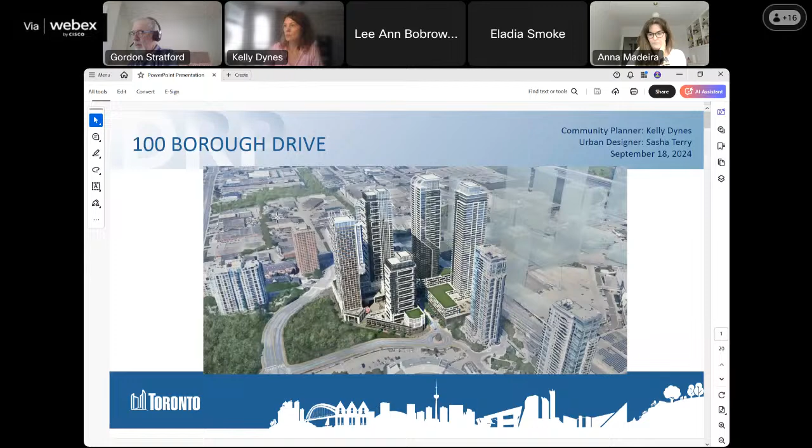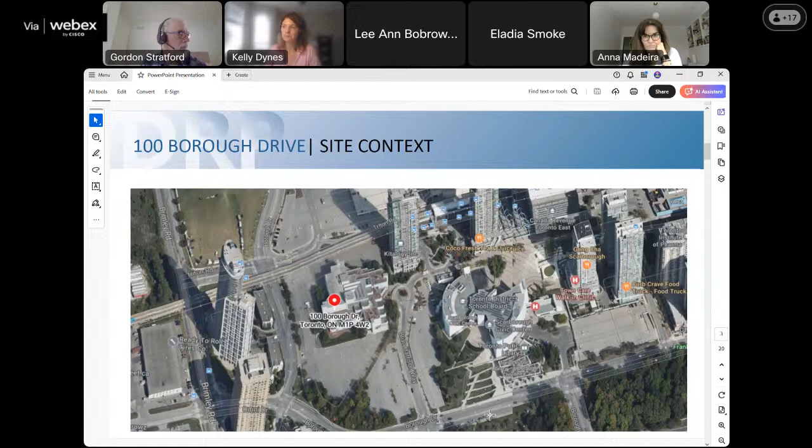The Bell Canada building is representative of the late modernist architectural style, constructed in 1978 by Short, Tilbe, Henschel, and Irwin Peters. It's listed on the city's Heritage Register through Delegated Listing Authority.

The Bell Canada building relates to the Scarborough Civic Center in plan view as a geometric pinwheel form responding to the irregular shape of the lot and the geometric pyramidal form of the Scarborough Civic Center. Additional design geometries can be seen in Albert Campbell Square with its radiating paving patterns, the Federal Building, and the blue canopy on the right-hand side. While not seen in this photo, there's also a water feature within Albert Campbell Square demonstrating the same triangular cascading form. Recent additions include the Civic Green in the middle of the property, and the rooftop of the Scarborough Center Library, which also continue this geometric landscape.

Staff are recommending design commemoration of the building with the proposed new redevelopment.

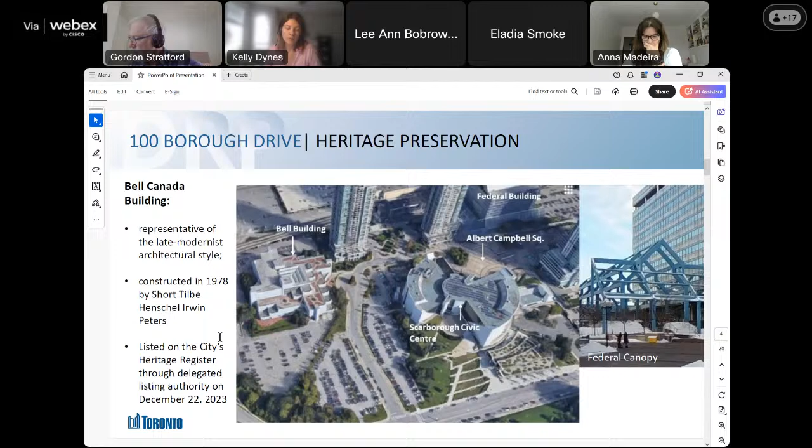This slide provides some additional views surrounding the site. The top left is a view from the subject site looking north, and a view looking east at the TDSB portion of the Scarborough Civic Center. Bottom left is looking across Borough Drive at the existing condo and townhouses. Here we see an important view from the intersection of Borough Drive and Brian Harrison Way to the building itself.

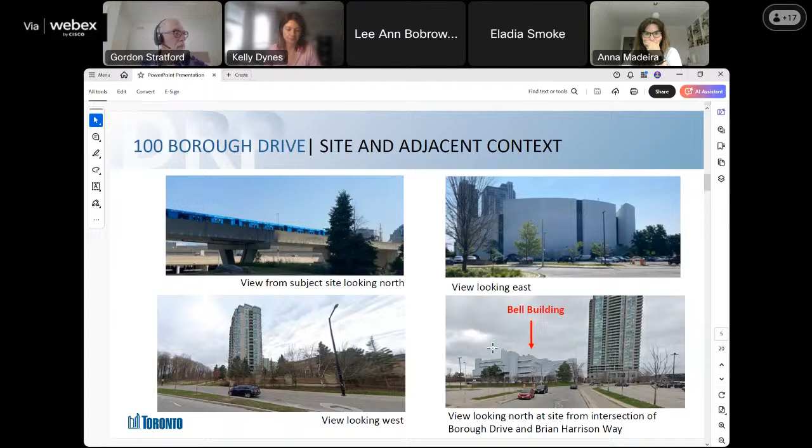I might just skip over this slide because I know the applicant will be talking about their specific application. As Gordon mentioned, it's an OPA and a rezoning, 3 blocks with 5 towers, just over 2,000 residential dwelling units, a public park, and a public street.

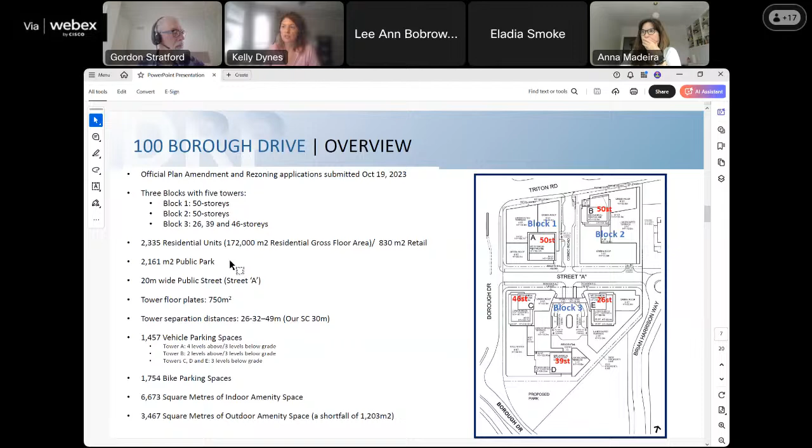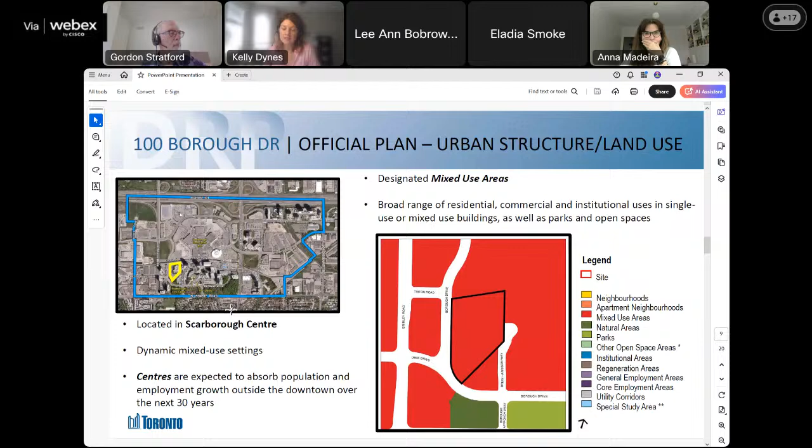Planning policies that guide the site: Scarborough Center is one of 4 growth centers in Toronto, as outlined on the map in blue. Centers are where we expect excellent transit accessibility and absorption of population and employment growth. Most centers are designated mixed use, including the subject site, which permit a broad range of residential, commercial, and institutional uses. The site is zoned City Center Residential and City Center Town Square Zone, which permit all residential dwelling units and some commercial uses.

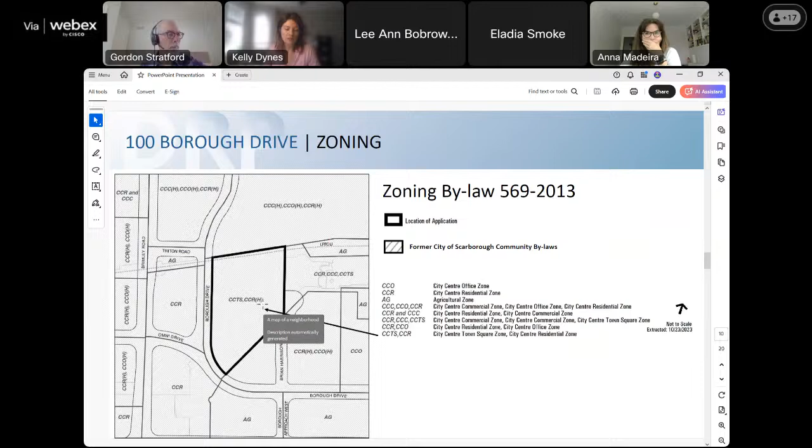Within Scarborough Center, we've seen significant investment in the form of transit and associated development pressure, and staff have been working on updating the Scarborough Center secondary plan. We expect to take draft policies out later this year or early next year, with a final staff report next year.

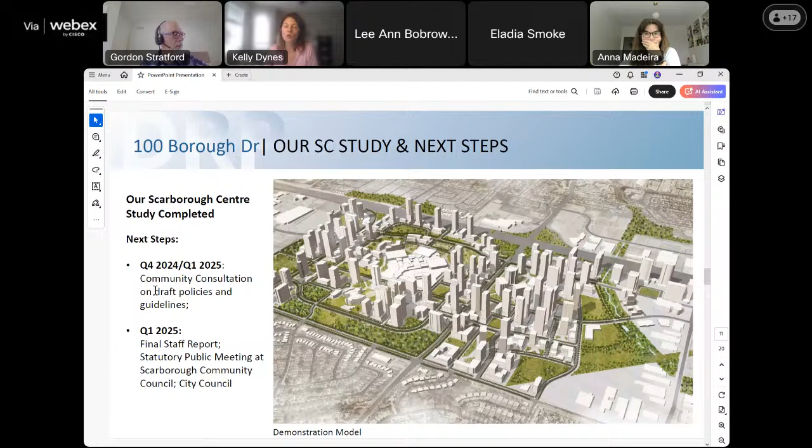Our Scarborough Center public realm plan envisions a central east-west 20-meter right-of-way neighborhood public street that connects to the existing public realm framework of Brian Harrison Way and Albert Campbell Square. We're also looking at a southerly on-site public park that protects the remnant woodlot along Borough Drive, a northerly SRT POPs, a commemoration of the SRT land in the form of a POPs, and a central north-south POPs mid-block connection that connects the public and private landscapes to Frank Faubert Woodlot Trail to the south.

Our Scarborough Centre study also gives guidance to protecting sunlight on important urban squares, parks, and natural features within the Scarborough Centre. Albert Campbell Square is a community focal point and urban square for Scarborough Centre, which includes seating areas, park areas, and an amphitheater that hosts community events during the day and evening. 7 hours of free, incremental shadow are recommended for protection of sunlight on Albert Campbell Square, which fronts the Civic Centre between 11:18 and 6:18 p.m. during the spring and fall equinox.

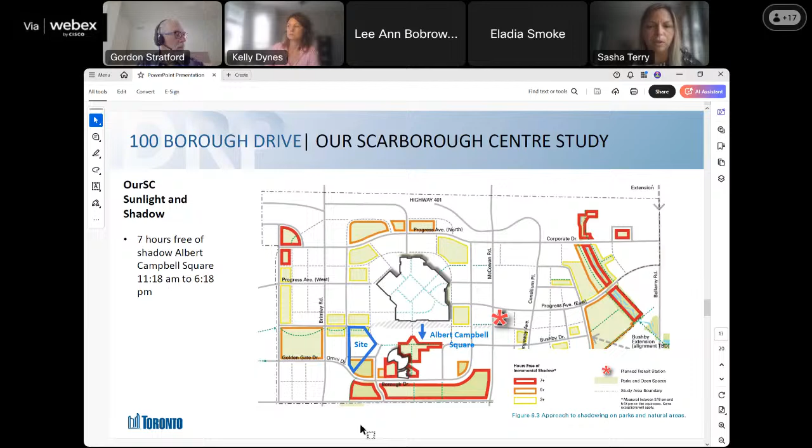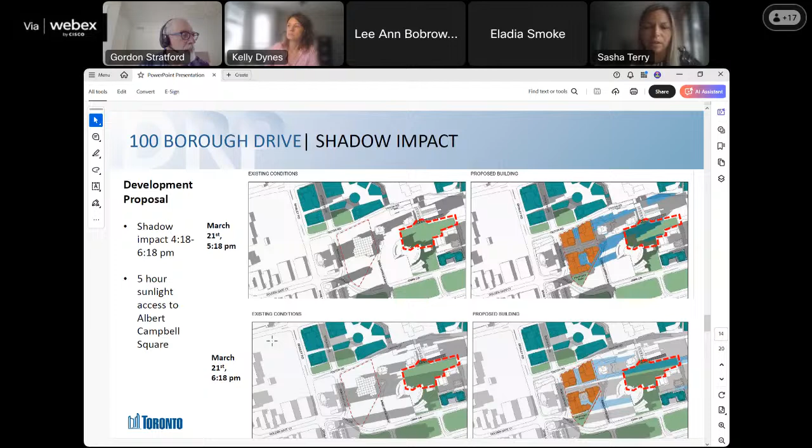The current proposal reduces sunlight on Albert Campbell Square from 7 hours to 5 hours due to 2 hours of shadow impact from 4:18 to 6:18 p.m. The southerly block towers are more impactful, casting shadows throughout the square between 4:18 and 6:18 p.m. Northerly block towers cast shadows on the northern portion of the square at 6:18 p.m.

So the current Scarborough building height strategy directs tallest heights to three emerging height peaks: a height peak at the subway station, a height peak along the 401, and a height peak at Brimley and Progress. Heights between the height peaks are to transition down to define the height peaks and fit within their existing height context.

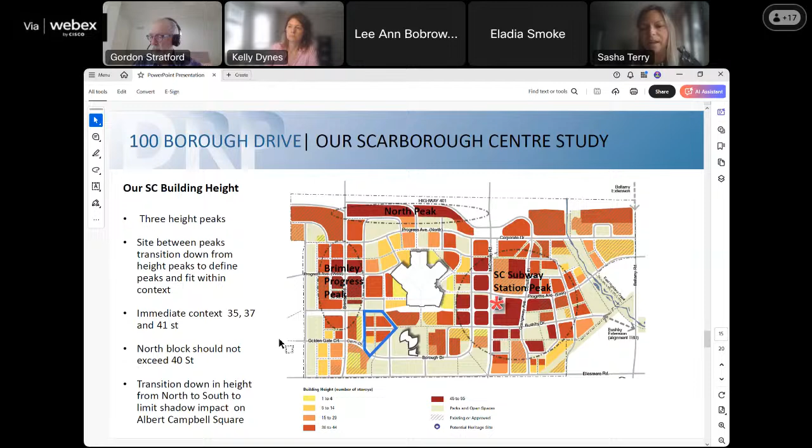This site is located outside the Brimley height peak and has an existing height context of 37 stories residential condominium to the east, 35 stories to the west, and 41 stories to the north. Staff's position is that the site should not exceed 40 stories at the northern block and should transition down in height from north to south to fit within the existing tower context and limit shadow impact on Albert Campbell Square.

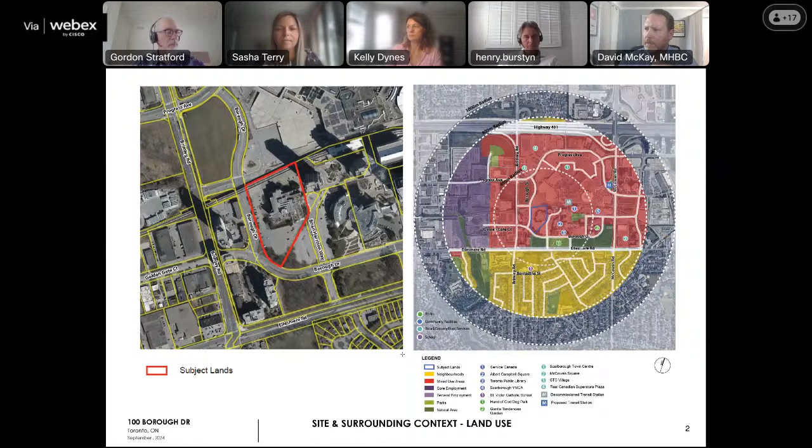The site in red is shown here. One item to clarify is that the SRT along the northern portion of the site is located on the property and not adjacent to it. So it is part of the property and is scheduled to be removed as per a legal agreement with the city and TTC.

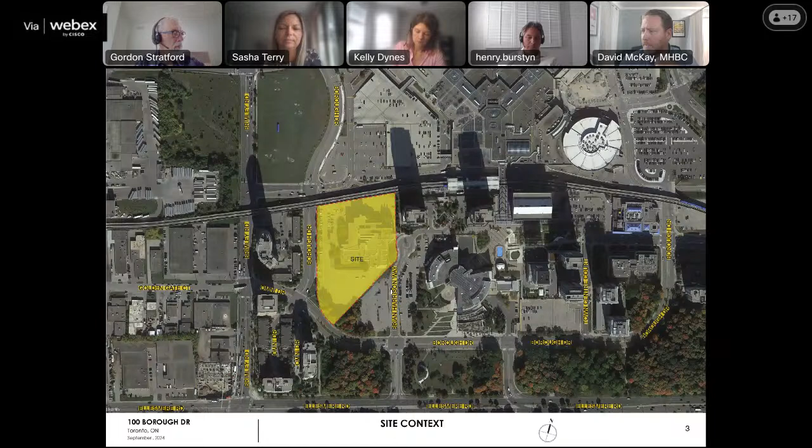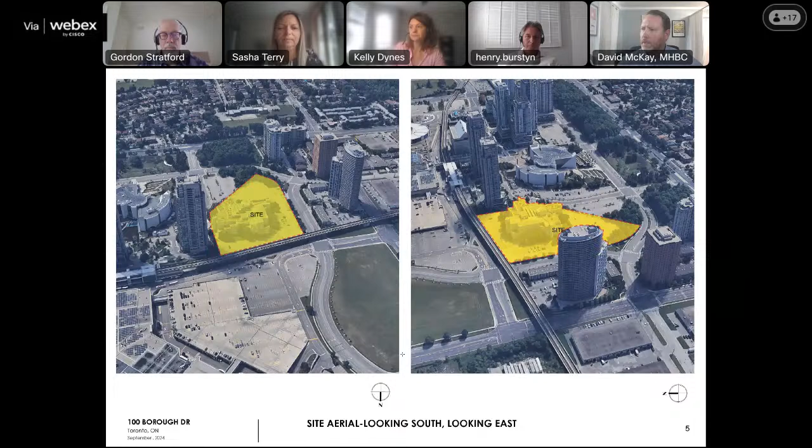These are just some views of the site from different angles. You can see the various developments that have occurred over the last 20 to 30 years surrounding the site, and then some photos of the site and surrounding area at grade.

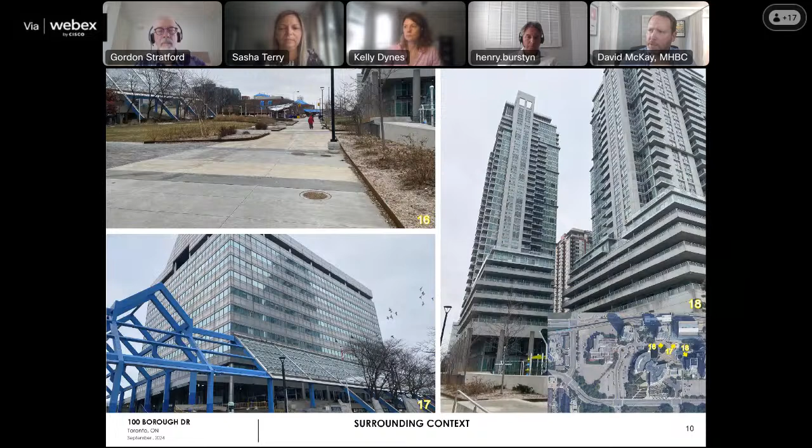There are a series of easements across the property. A number of them are in favor of the City of Toronto and will be relocated or removed as part of the redevelopment, and others in favor of private development, which we can also remove through legal means per the agreements with those entities.

As staff have mentioned, there are a series of development applications anticipated and in progress as part of the redevelopment of Scarborough Town Centre and surrounding area in relation to the future subway extension to the area.

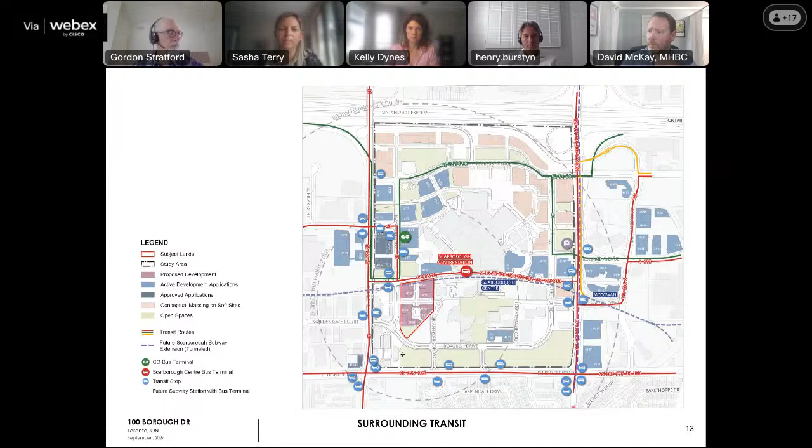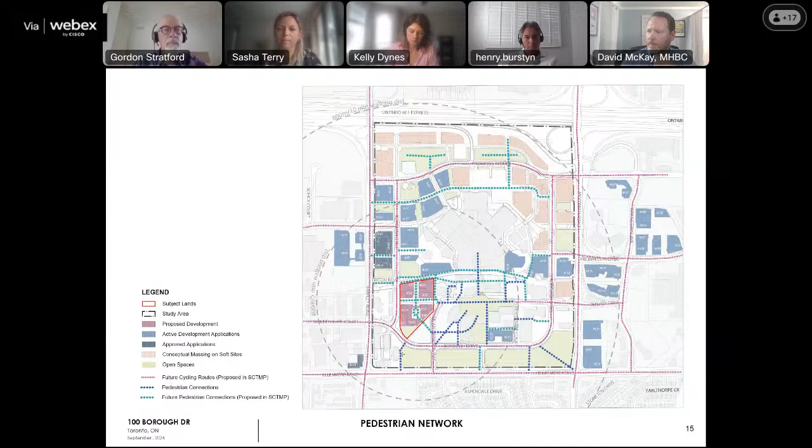This site is within 800 meters of the future subway stop, so within the MTSA as per provincial guidance. As part of the development of the area, a series of existing parks will remain, and future parks are planned, including on the subject lands at the south end, which we'll get into in more detail. It's very well connected in terms of transit and vehicular movements through the area, which Henry will talk to in more detail, and obviously the pedestrian network as well.

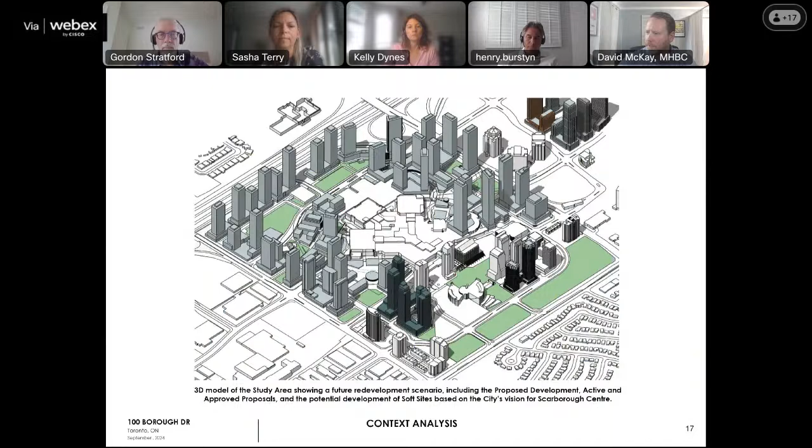Services are plenty in this area. This is the proposal in context of the massing studies that have been submitted for the surrounding area, similar to the demonstration plan shown by staff. The proposal is shown in dark green at the bottom of the image.

In terms of the building itself, a heritage study was undertaken by our firm, which determined that while it did meet 2 of the 9 criteria under the Heritage Act, it was not worthy of preservation, and staff have recognized that through the commemoration aspects and requests in the application.

Henry, I'll pass it over to you to talk about the site design.

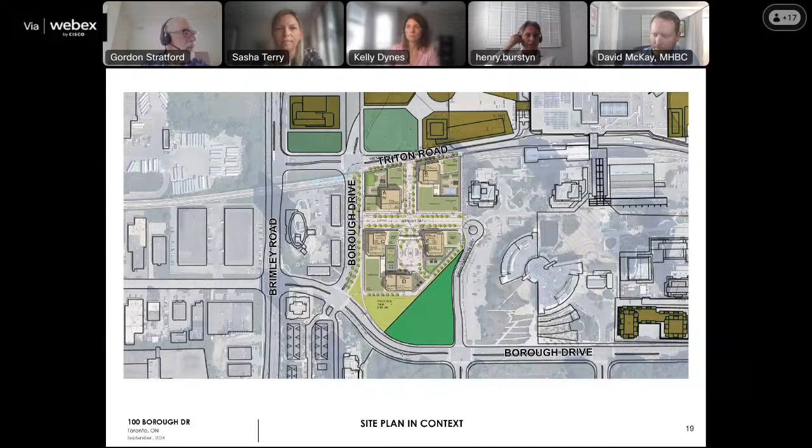Sure, maybe you could switch to the larger site plan, David? Yes, there you go. Thanks so much.

Thank you, everyone. David did a great job outlining the fact that this site has an incredible amount of infrastructure, close walking distance to transit, shopping, parks, and other significant investments. That's what our site plan is looking to build upon.

We've proposed a site plan that is a 6-acre parcel, organized into 3 development blocks: Block 1 at the northwest, Block 2 at the northeast, and Block 3 at the south. We've divided the blocks with a new public street introduced through the middle of the site, connecting Borough Drive to Brian Harrison Way.

That new street will provide new street trees, wider sidewalks, and a new connection to Albert Campbell Square. Borough Drive, in its final design, will be a very wide boulevard featuring new sidewalks, a bike lane, and a double row of trees. We've also introduced a new north-south condo road between Blocks 1 and 2, which will provide a new alignment for the city sewer, as well as more permeability through the site for both traffic and pedestrians.

The park has been proposed at the south. It's a 0.53 acre park, and it's currently the location of the woodlot, so we thought it's the most ideal location to place the park to preserve that natural feature. It allows that to effectively connect to what could be an impressive ring road or ring park leading to the Hand of God Park.

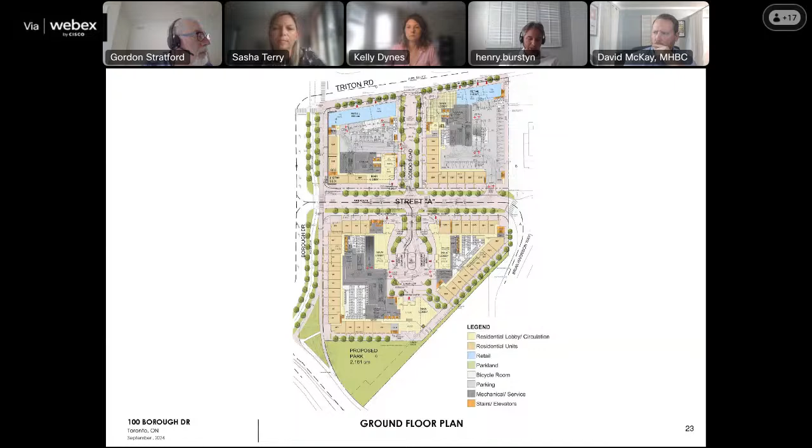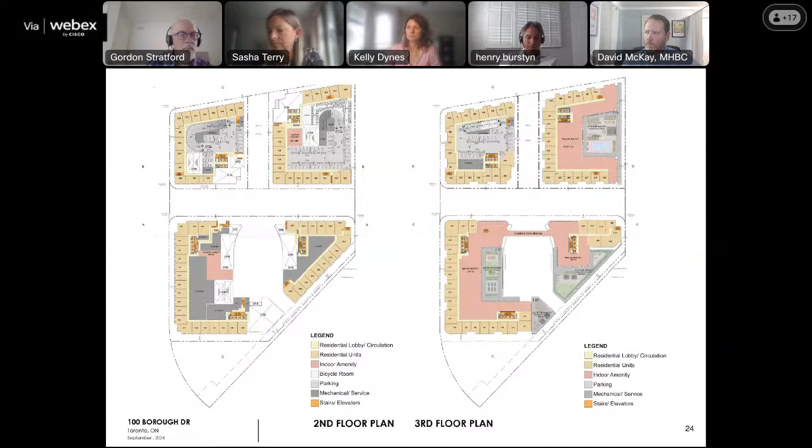Here you can see there's a component of above-grade parking, but we've tried to flank that around the perimeter with activated uses, shown in orange, for the majority of those faces. The gray is some of the above-grade parking component. In pink is the indoor amenity space, which we're oversupplying, while slightly lowering the outdoor to allow for a 4 square meter ratio between indoor and outdoor.

This continues until we get into the tower plates, which are 750 square meters in size. You can see the great separation between those towers, with as much as 50 meters between some of them.

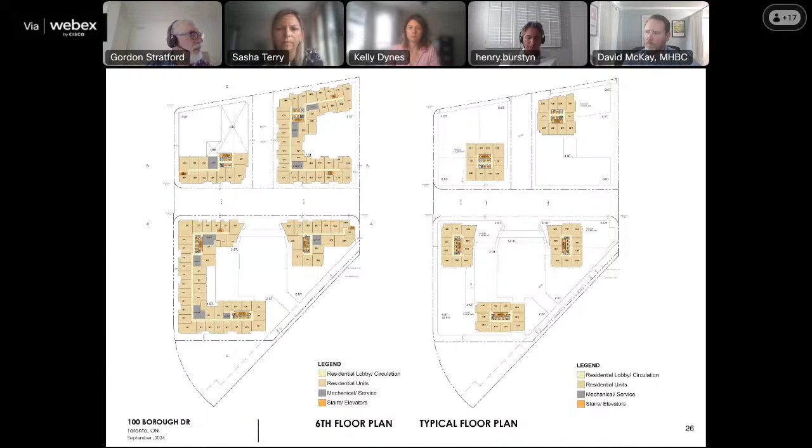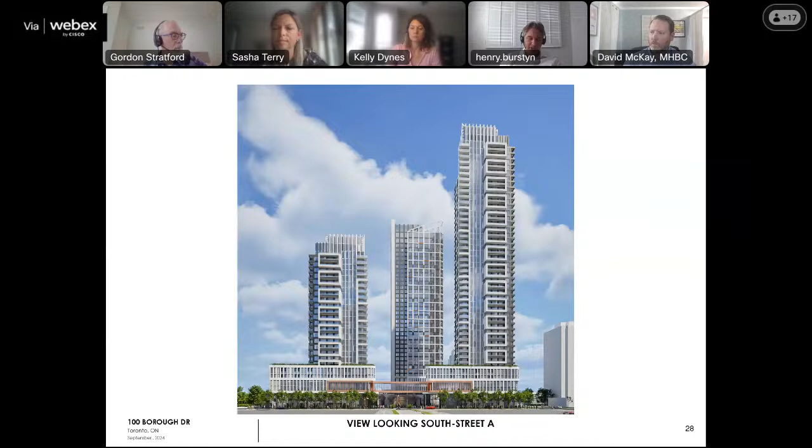Here's a view looking south along Street A, which has a pedestrian-scale podium with an accented bridge, creating an entry. Our signature building is in the rear, with 2 flanking buildings that are effectively twins of each other, with the 26-story being the lowest to minimize any impacts on shadowing on the square.

The northern 2 towers also have a very strong vertical expression that carries into the roof lines. What we're trying to do is create 5 unique buildings in a sense, but also maintain a similar design language so all the blocks work together nicely, while still having variety within both the built form expression of the towers and the podium. You can start to see how activated the ground floor is with some of the retail.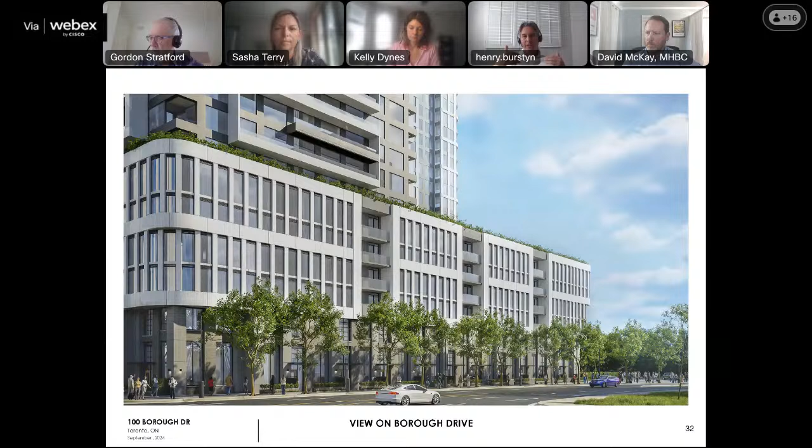Continuing along Borough, this is going to be a great street with bike lanes and a double row of trees. We've tried to have a 6-story base with a variety of materials, set back from the tower. Next we'll walk you down the street.

This leads to the entrance and a very open space allowing permeability through the site, also framing that entrance as we eventually move towards the east.

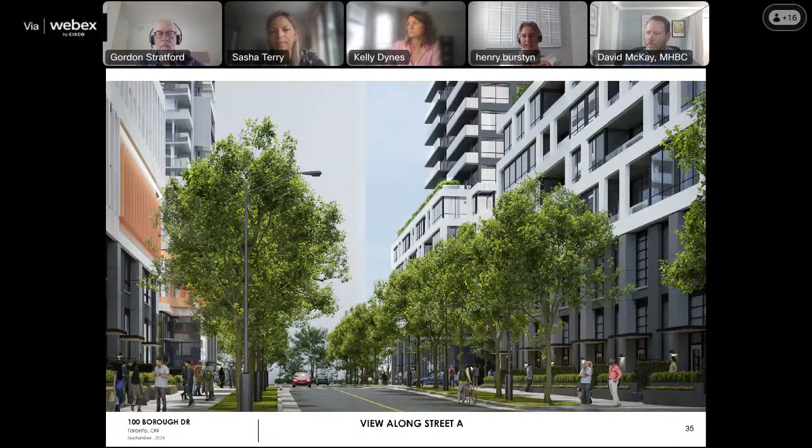This is another view of the transformation of the street and the connection through the site. Even the condo road we're doing to the north, we want to make feel like a public street as well. That wraps up our presentation.

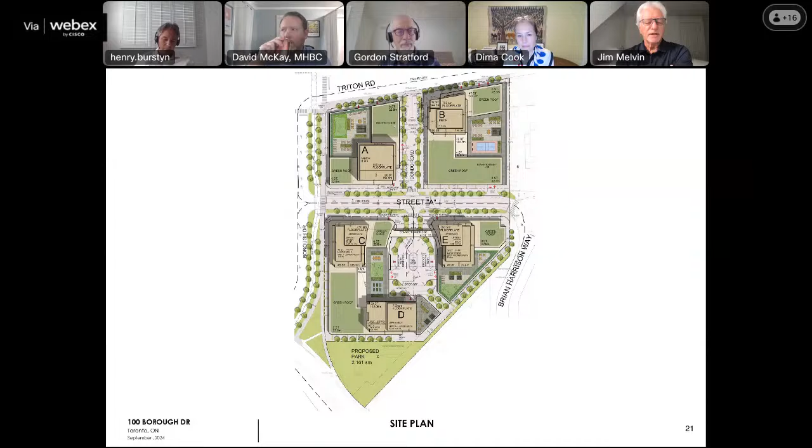There's approximately 5,000 new people coming to this new development, and the proponent's information states there are 2 off-leash dog areas in the remnant woodlots. How much are those woodlots used, and what's their capacity for another, I'll say, 1,500 dogs from this development?

It's an excellent question. Unfortunately, I don't know what their capacity is. I would expect, just based on my observation, that they could not accommodate another potentially 1,500 dogs. Thank you very much, Kelly, for that answer.

So then I will ask the proponent. They've done a great job at providing interior amenity space, actually double their exterior amenity space. Where is their off-leash dog area located for their development?

The proponent. Right, do you want to tackle this one? Sorry, where the current proposed amenity area is? No, where's your current off-leash dog area for the new 1,500 dogs that are going to come to this development?

We haven't. How are you handling dogs on your site? We haven't actually designated that yet, Jim. So that's something you still have to consider.

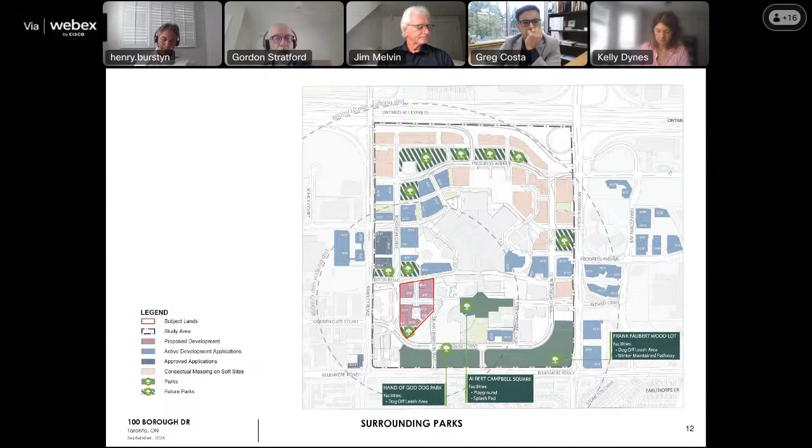Two questions. The first is, I haven't heard the word affordable housing from anybody today yet. Can I please hear something from the proponent about how they're committed to affordable housing with the volume and density proposed?

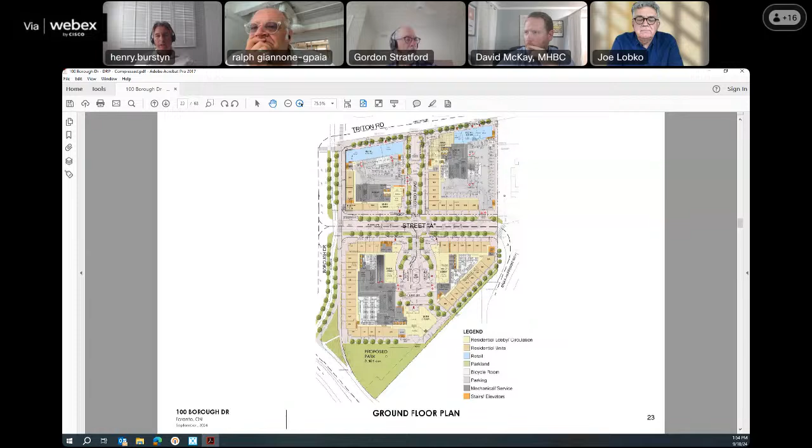Okay, so there's definitely some changes in grade here. This was one of the advantages of allowing retail to happen at the north, because the floor level can cascade or be somewhat flexible, particularly on the block towards the west. On the east it's more challenging, so the idea was to have a raised area outside the retail, with steps down to the sidewalk along Triton. It gets steeper as you move east, but elsewhere some of it can be mitigated by changes in the retail level.

Just to clarify, Henry, where the blue retail is at the northeast corner of Block B, that would be kind of raised, I guess. There would be a change in grade between the sidewalk at the curb and that retail. Yeah, what we have is it does flatten out. There's a slight retaining wall condition, and then some steps come down. Greg, correct me if I'm misstating any of that.

Correct, Henry. And just to further clarify, in terms of accessibility at the northwest corner where it says main lobby, that's where the divergence begins, where the retail side has an upper level that starts to terrace away from the street level. However, anyone can access the retail from that northwest corner — it's all still fairly flush there. Then you'll have a series of vanishing stairs that begin to appear as you go eastwards. Hopefully that's clear.

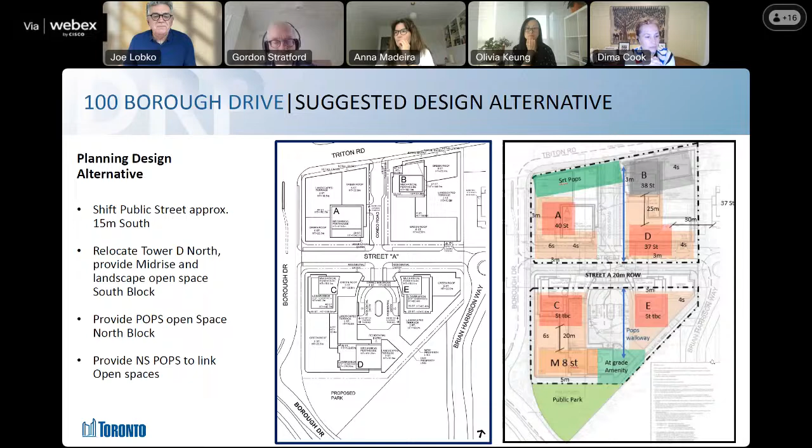Thank you to all the panel members for the comments. I was wondering if we could put up page 3 of the proponent team's presentation, called Site Context. Just hold for a second while that's put up.

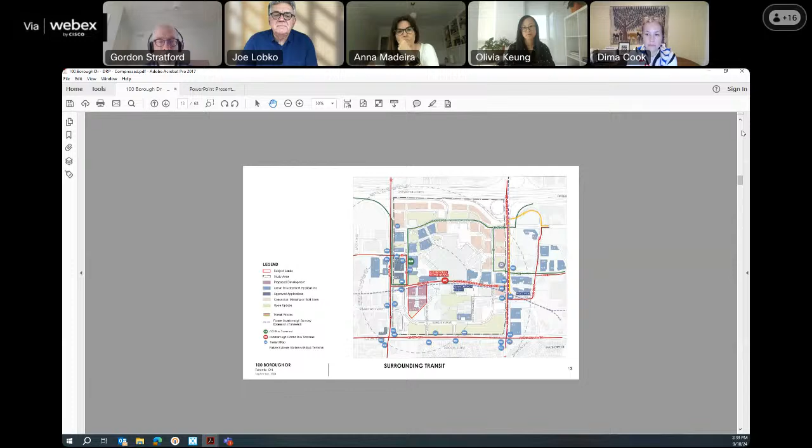Getting close. Yes, that'll do. And if you could make it a little bit bigger, if possible, that's great.

Yes, that's great. I know I'm supposed to identify the five key issues that panel members have identified, but I think they've come through very clearly. And I think the comments about acknowledging the amount of work done by both the proponent team and the city staff team is very important, because it's clear a lot of thought has been put into it. And I sense a desire to reach a solution that is not only good for the site, but also good for the neighborhood. That's why this site context drawing is up on the screen.

We, as a panel, have had a long relationship with Scarborough Town Centre. We've seen many projects occur there. We've watched and participated in setting the dream of how this area can transition and be reborn as a truly urbane and urban environment. Along the way, we've seen some sites which have absolutely nothing around them that could be said to be highly attractive or spark a creative solution.

But the site that you have is not any site. It's truly remarkable. On the overall Scarborough Town Centre site, there are many parts that do not have the cultural context that's immediately adjacent, indoor and outdoor, including a fairly heavily forested space to the south of your site. These are things that really need to be taken full advantage of.

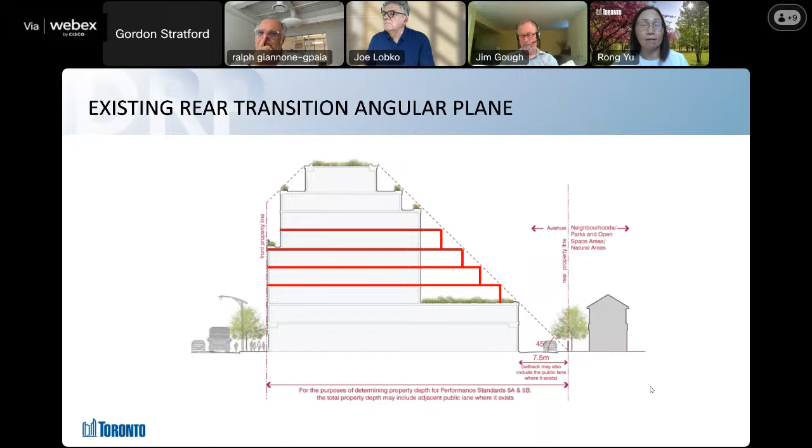In the 2022 to 2026 Housing Action Plan, updating the rear transition in the mid-rise performance standards was identified as part of the avenue and mixed-use area work program.

The avenues and mixed-use area work program includes avenue policy review, expanding mixed-use areas, urban design rear transition update, and also updating as-of-right zoning for avenues to enable mid-rise development.

Based on this work program, urban design reviewed and consulted with industry experts on the rear transition performance standards in 2023. A proposal report on the draft mid-rise rear transition standards was presented at the Planning and Housing Committee in June 2023.

Most of you are probably already familiar with this update. It basically removed the 45-degree angular plane and used step backs for the rear transition. This update has been able to maintain the transition and also provide more flexibility with design solutions.

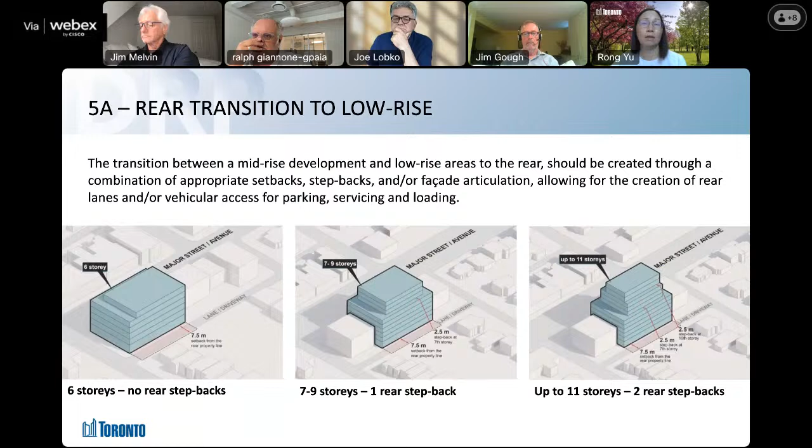Following the draft proposal, urban design, together with the zoning team, held several public and stakeholder consultations in summer 2023. The consultation received feedback on the rear transition update, as well as feedback on other performance standards in the current mid-rise guidelines.

Staff reported on the consultation feedback at the November Planning and Housing Committee. There were two requests from the Planning Housing Committee for mid-rise guidelines: one was to finalize the rear transition performance standards by the middle of 2024, and another request was to send the draft consolidated mid-rise guidelines by the end of 2024.

The zoning team and the urban design team conducted more consultations on the rear transition in the spring of this year. We sent the June 2024 report to the Planning Housing Committee to provide a further update on the rear transition. The zoning team will send the final report to the Planning Housing Committee and Council in October this year, which will include final updates to the rear transition in the bylaw.

This rear transition final update eliminates the upper 2.5 meter step back at the 10th floor to further simplify the mid-rise massing. Alexis will present more details on this final update later.

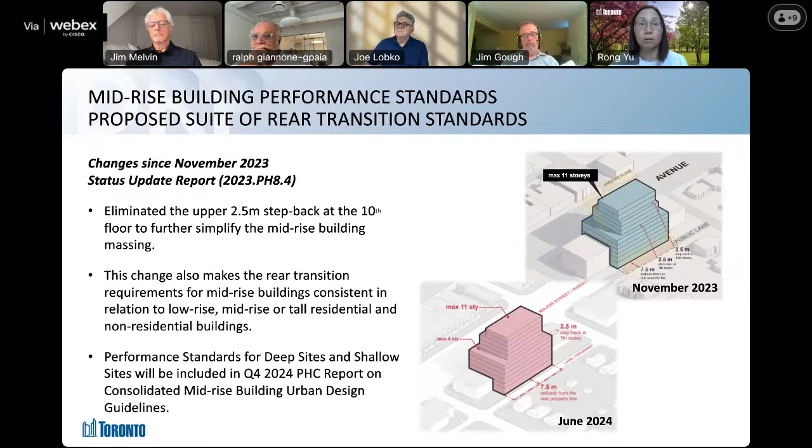Parallel to the rear transition update process, we have been working on the consolidated mid-rise building design guidelines. We plan to send the guidelines to the Planning Housing Committee on December 5th, 2024.

The consolidated mid-rise guidelines aim to encourage mid-rise development that is more economic to build and more environmentally sustainable. The updated guidelines will be consistent with the city's tall building and low-rise guidelines to form part of the city's three building scales identified in the official plan built form policies.

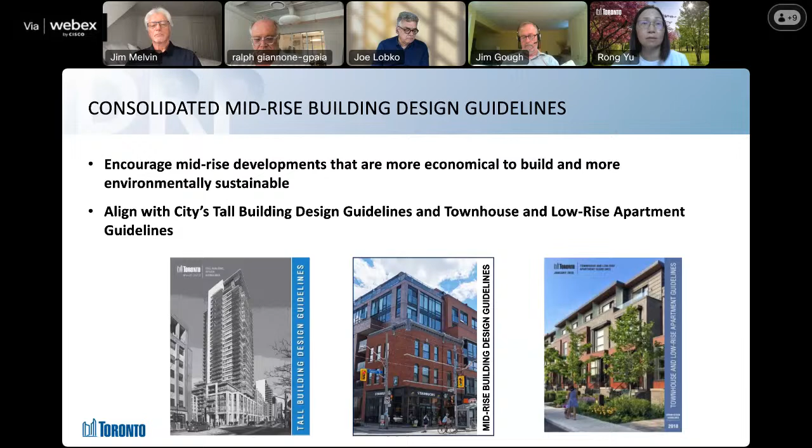Now we're going to move on to the guidelines' key updates, beginning with the table of contents. The table of contents is aligned with the tall building and low-rise guidelines. Most current performance standards will be found in section 2.0 Site Organization, section 3.0 Mid-rise Building Design, and the 4.0 Public Realm sections.

One thing to mention here is that the current Performance Standard 19 represents a change in the table of contents. We worked with the heritage planners to locate Performance Standards 19 A, B, and C in the site context section, which relates to developments of heritage properties and in the heritage conservation district context.

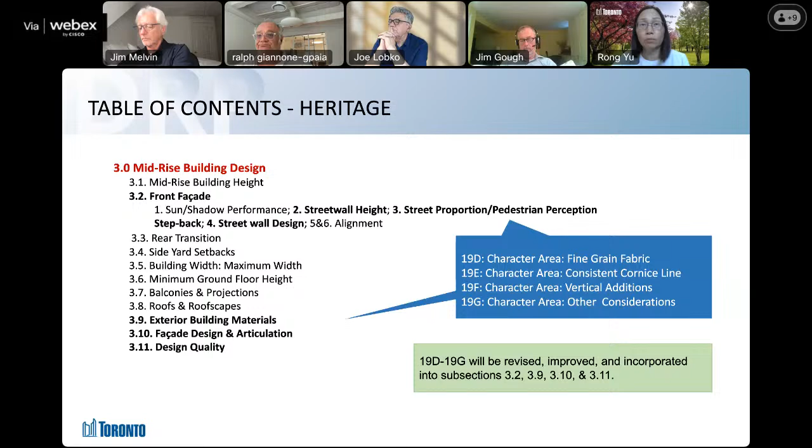So the performance standard 19D to 19G talks about the design of the building facade and the materials. These guidelines will be revised, improved, and incorporated into the building design section 3.0.

Moving on, same as the tall building and low-rise guidelines, the site context is the first section of the guidelines. The design of the building begins with evaluating the site context, so there are existing contexts to consider.

The typical mid-rise building in Toronto is located in the main street context. They have retail on the ground floor. The building is close to the front and all side property lines, with residential floors above typically stepping back from the base building.

Mid-rise buildings are also being developed in the residential neighborhood context. These buildings have active residential uses, such as townhouses or garden units with individual entrances on the ground floor facing the streets. They also have a generous landscape setback in the front yard with opportunity to plant a second row of trees, and windows on all elevations to maximize residential units' comfort while avoiding blank facades.

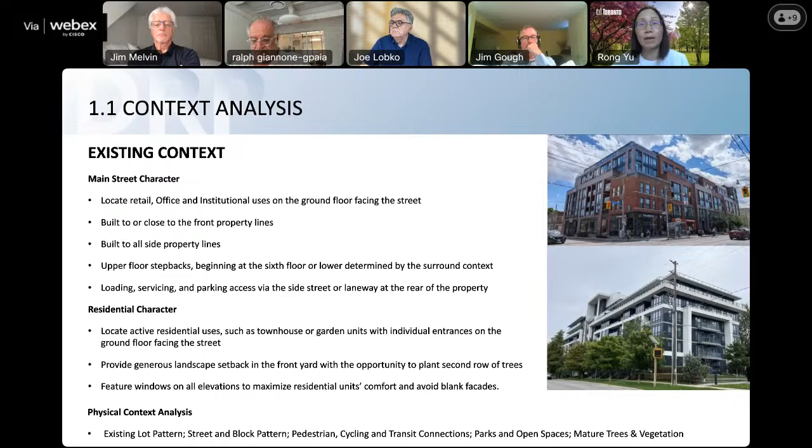There are many other physical contexts to consider as well, including existing lot patterns, pedestrian and cycling connections, parks and open space, and mature trees in the area.

We also need to analyze the planned context based on the city's official plan, urban structure, and land use policies. These policies in the OP provide the vision for the area, and the design of the mid-rise building needs to consider those emerging contexts.

Among the physical contexts, site typology or lot patterns have a major influence on mid-rise development. There are various lot patterns like deep or shallow lots, regular or irregular lots. The chart here identifies the ideal lot depths based on the new mid-rise building envelope.

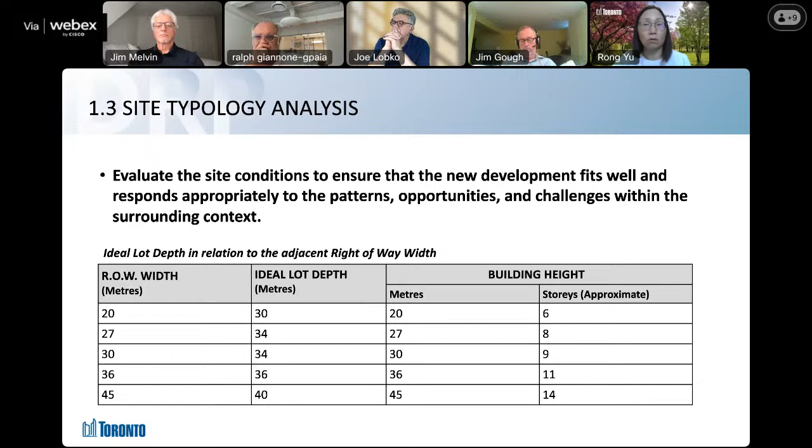For example, if the building is on a 20-meter right-of-way, the ideal lot depth is 30 meters for a 6-story building. The site typology analysis focuses on two typologies.

One is deep and large sites. The guideline will provide demonstration plans and guidance on designing deep and large sites, showing various L-shape, T-shape, or U-shape arrangements on site, addressing deep corner sites, deep mid-block sites, or deep courtyard sites.

I'm not going through the detail of those designs, but one thing to mention is for deep courtyard sites, we ask for approximately a 1-to-1 courtyard width to building height ratio in designing the courtyard, to allow for access to sunlight and a proper scale for the design of the courtyard and amenity space.

Another site typology in this section is through-lot sites. Through the EHON major streets work, many through lots—where the back faces the major streets and the front faces the local neighborhood streets—get rezoned, giving them the opportunity to build 6-story buildings through the EHON major streets update.

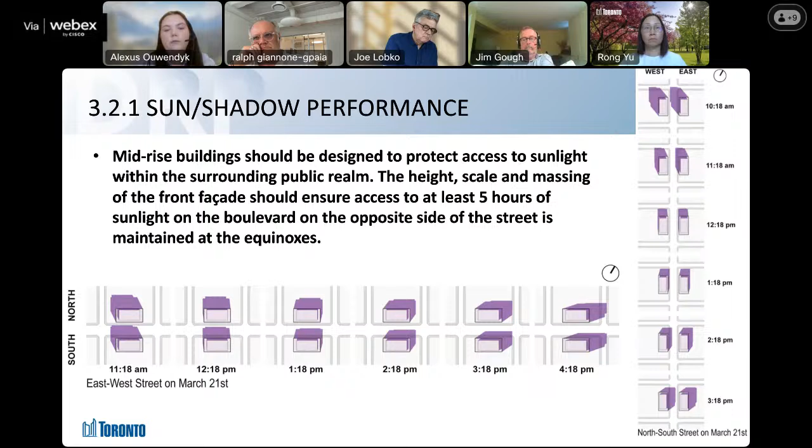This can be achieved through a combination of a setback at grade and a step back above the street wall, but the specific hours would be determined based on the orientation of the street. We've just illustrated east-west streets and north-south streets in the graphics here. However, we also have diagonal streets and other orientations, so those hours would vary in that circumstance.

Moving on to street wall height: street walls should be designed to fit harmoniously within the existing and/or planned context of neighboring building heights at the street edge, and respect the scale and proportion of adjacent streets and open spaces. In absence of an existing street wall height context, heights should be provided at a minimum of 3 stories up to a maximum of 6 stories to maintain the sense of pedestrian scale.

We are looking to achieve variation in street wall height, so that is encouraged, and in some cases the street wall height can extend up to 8 stories to create that variation and add emphasis to focal points on the site or adjacent public realm as well.

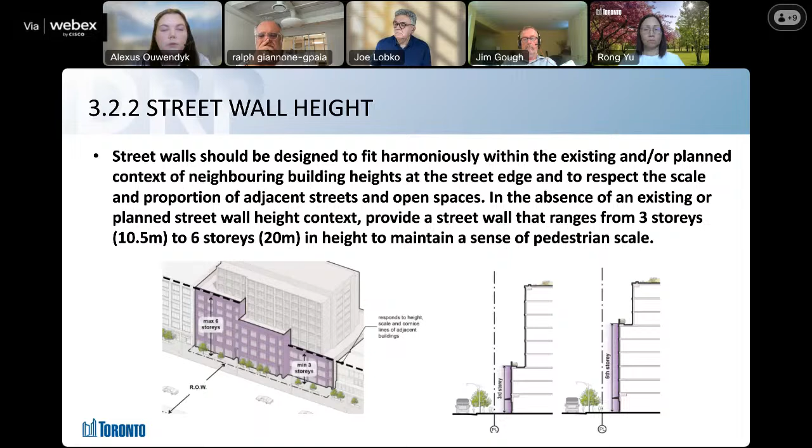Next, street proportion and pedestrian perception step back. Good proportion should be achieved by providing a step back above the street wall and a setback from the property line, where the combined dimension is generally equal to 20% of the building height. So in this, we're essentially translating the previous 80% angular plane into a step back and setback requirement.

The minimum dimension of the pedestrian perception step back should generally be no less than 3 meters to maintain legibility and prominence of the street wall and create opportunities for terraces of sufficient depth as well. As mentioned earlier, we are looking to encourage 1 step back above the street wall, hoping that this would align with the structure grid of the building and simplify the overall massing to, again, limit embodied carbon and energy inefficiencies.

As well, there should be consideration for the dimension of the setback at grade, which would require evaluation of existing and planned context, the character of the streetscape and the permitted uses, as well as consideration for the other guidelines, which I'll go over momentarily.

Next, street wall design. Street walls should be designed to support the adjacent public realm through well-articulated and appropriately scaled facades. This guideline acknowledges the important role the street wall plays in creating the backdrop for the public realm and animating the street. It will include guidance related to cultural heritage, respecting heritage properties and creating comfortable yet highly animated pedestrian environments.

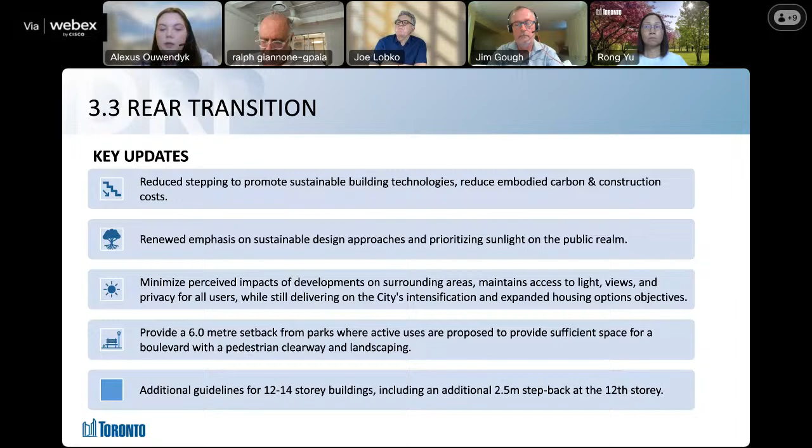Key updates since the initial draft include the provision of a 6-meter setback from parks where active uses are proposed, to provide sufficient space for a boulevard with a pedestrian clearway and landscaping, essentially treating that rear edge like a frontage fronting onto the park. Lastly, we're also including additional guidelines for buildings of 12 to 14 stories, addressing the increase up to 45-meter rights-of-way and 45-meter tall buildings, which would include an additional 2.5-meter step back at the rear above the 11th story.

This rear transition should be achieved by providing a minimum setback of 7.5 meters from the rear property line to the building face. For buildings up to 6 stories, there's no requirement for rear step backs. Buildings between 7 and 11 stories should introduce a 2.5-meter step back between the 3rd and 7th story, and the height of that step back should be determined by evaluating the existing and planned context to respond appropriately. Lastly, for buildings between 12 and 14 stories, an additional 2.5-meter step back should be introduced above the 11th story.

On corner sites where there's no opportunity for a rear lane, the rear setback may be reduced to 2.5 meters for the portion of the building that fronts onto that side street, to create a continuous street wall. The space between the building and the property line can then be used for landscaping. In this situation, the wing element would be no greater than 4 stories and have no primary windows facing the shared property line.

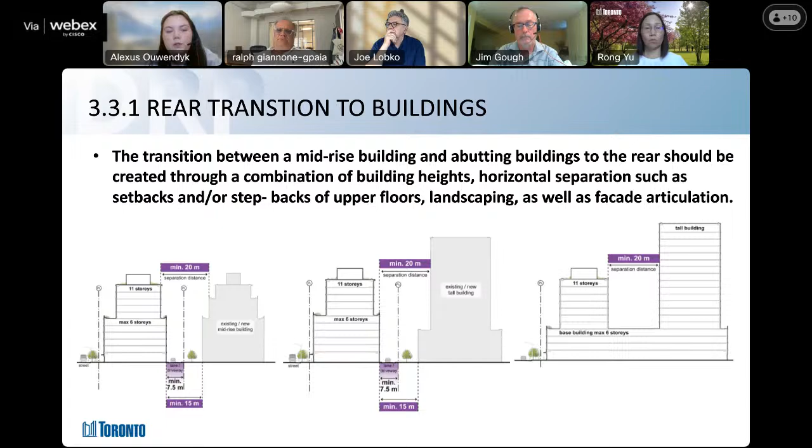Moving on to transition to parks and open spaces. This transition should maximize access to sunlight, minimize shadow impacts, and create comfortable wind conditions through a combination of setbacks and step backs. We're looking at two general approaches to rear transition here: the first where there is rear access along the park edge, and the second where there is an active edge.

The transition for mid-rise buildings with access at the rear would provide a 10-meter setback from the property line to allow for vehicular access, as well as a 2.5-meter landscaped area. Where there is no vehicular access along the rear, the lower portions of the building should provide an active edge at grade, and that setback would be reduced to 6 meters minimum, to provide sufficient space for sidewalks and landscaping and create a boulevard condition along the park.

So, rear transition for shallow sites. The purpose of this guideline is to unlock the development potential of shallow sites that would not be able to meet the rear transition standards, but would otherwise be appropriate for mid-rise development. Consideration will be given to expanding the site to include additional properties to the rear to enable that development, while adhering to all front, rear, and side setbacks and stepbacks.

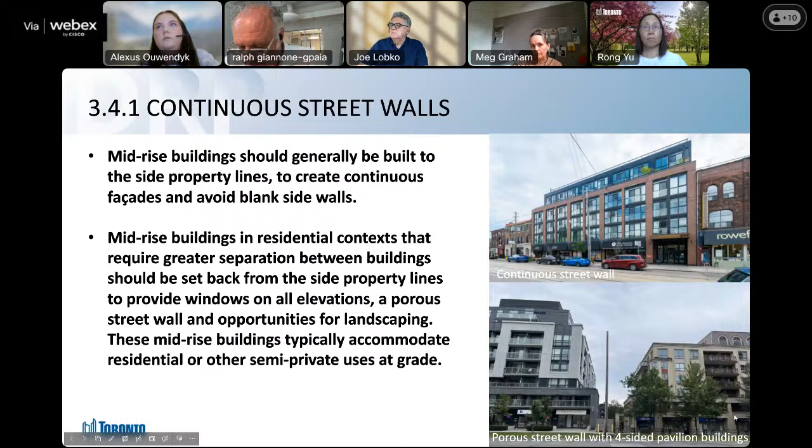As it relates to continuous street walls, the guidelines will continue to encourage that buildings are generally built to the side property lines to create continuous facades and avoid blank side walls. However, mid-rise buildings in residential contexts that require greater separation between buildings should be set back from property lines and provide windows on all elevations, a porous street wall, and opportunities for landscaping. We've illustrated those various conditions in the images on screen here.

Side stepbacks at upper stories should be provided above the street wall to create breaks between new and existing or multiple new mid-rise buildings, providing sky views and increased sunlight access to the sidewalk. This is generally consistent with the existing performance standards, where the continuous street wall can be built to the property line and primary windows provided above, so long as there's a 5.5 meter stepback from the property line. This is illustrated here in various conditions, where you could have a continuous street wall or a more porous street wall with a pavilion type building, where that 5.5 meter stepback would be required from grade.

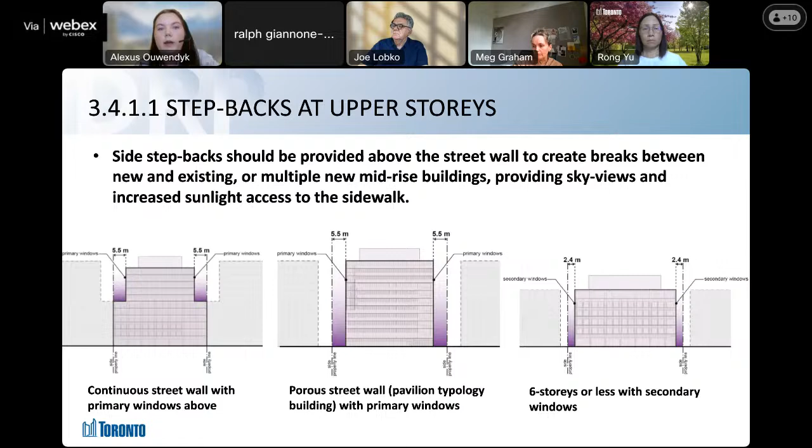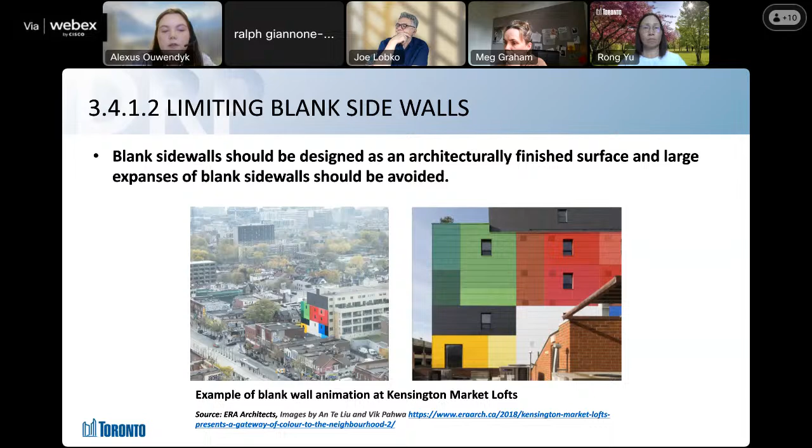Regarding blank sidewalls, the guidelines will continue to discourage them. We're looking to mitigate blank side walls and ensure they're designed with a material finish that complements the architectural character of the main building facades, and also recognize that they provide an opportunity for visual interest when viewed from the public realm. They should incorporate high quality design treatments such as green walls, murals, or other facade enhancements where appropriate, such as this example here from Kensington Market.

For side windows, mid-rise buildings should provide side yard setbacks that appropriately respond to the facing conditions of the abutting properties. Existing buildings with side wall windows should not be negatively impacted by these new developments. Specifically, they should be designed with regard for the existing and planned condition of the abutting properties. In determining appropriate side yard setbacks, consideration should be given to the redevelopment potential and the facing conditions, both present and future.

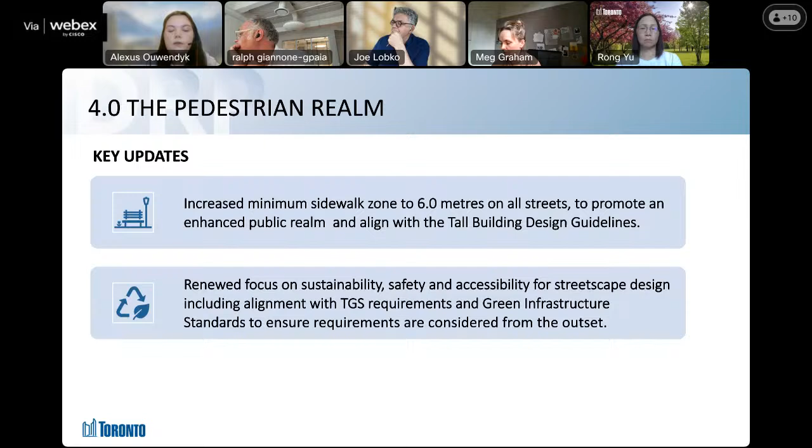As I mentioned, mid-rise buildings should be set back at grade to provide a minimum sidewalk zone of 6 meters. The pedestrian clearway should be a minimum of 2.1 meters and should be located away from the curb to ensure the safety and comfort of pedestrians.

A 2.5 meter minimum furnishing and planting zone is encouraged to provide sufficient space for tree planting and support the growth of mature trees and other pedestrian amenities. We're also considering wider sidewalk zones, which may be required on major streets or other transit corridors to accommodate increased pedestrian traffic and transit infrastructure.

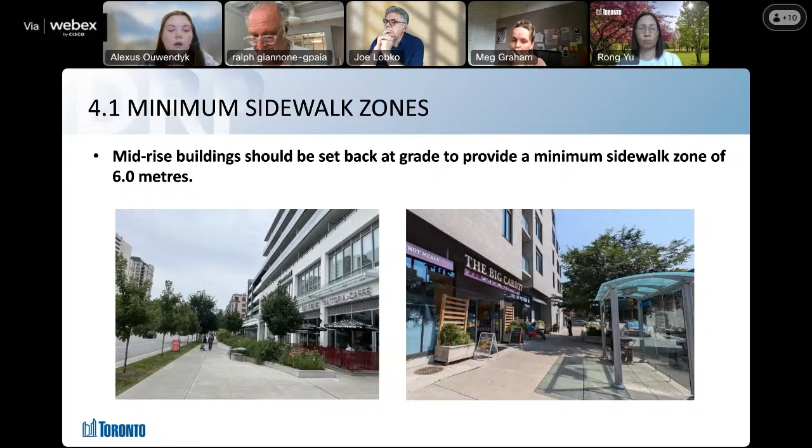For streetscaping, mid-rise buildings should provide vibrant pedestrian-oriented streetscapes with the highest level of urban design treatment to create beautiful, comfortable, sustainable, safe, and accessible pedestrian environments and great places to shop, work, and live for all. The guidelines want to ensure that streetscapes follow the classifications, placement guidelines, and design details in the Urban Design Streetscape Manual.

Tree planting strategies should ensure that sustainable conditions for growth of mature trees are provided, and that existing mature trees are preserved wherever possible. We're also generally looking to maximize tree planting opportunities within the public realm, minimize utility conflicts by coordinating and relocating above and below grade utilities to accommodate tree planting opportunities, ensuring we're meeting complete street objectives as well as our target for 40% tree canopy cover.

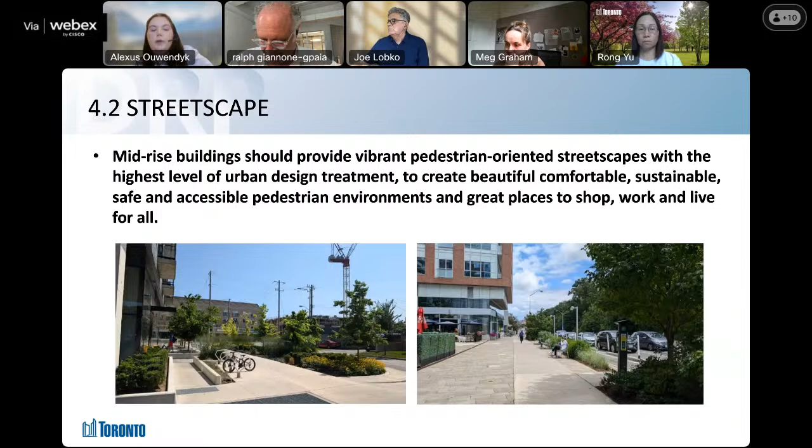So I think with that, yep. I'm sorry to butt in. At the moment, you have about a minute left, but I have a sense that you're probably going to need more than a minute for the things that you have remaining. How much more time do you need? If we could have maybe 5 more minutes, that would be great. If not, I can try to run through the last few slides quickly. No, let's aim for 5 more minutes. Okay, that would be great. Thank you so much. Thanks.

So just lastly, moving on to site organization updates. These are just kind of a high-level overview of some of the updates. As we know we're tight for time, there are many other updates we would like to discuss, but we're just going to highlight public and private open space and connections firstly.

This update to the guidelines will introduce general site planning principles into the guidelines, to be consistent with tall building and low-rise guidelines, as Roan mentioned earlier, and to ensure these principles are considered in the design of mid-rise buildings. Similarly, we also want to promote the inclusion of open space and landscape mid-block connections on mid-rise sites, making sure these are creating livable communities supported by a variety of amenities and open spaces.

Generally, mid-rise buildings should provide grade-related publicly accessible open spaces. They should connect and extend to the existing network of public streets, parks, and open spaces. They should provide a range of high-quality, comfortable, private, and shared outdoor amenity spaces, and lastly, comfortable, safe, accessible pedestrian and cycling routes throughout the mid-rise building site to connect to adjacent routes as well as priority destinations such as transit.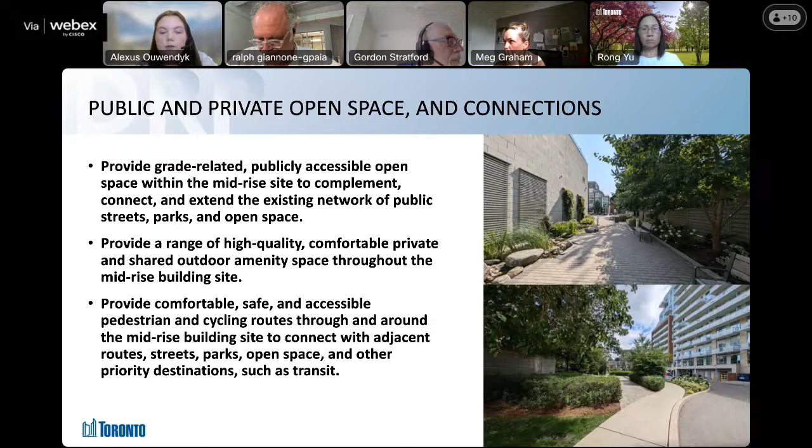On the screen here, these are some examples of the types of spaces we've seen in mid-rise buildings across the city, where they're also used to soften the edge of the site and also create the transition to adjacent neighborhoods.

And then lastly, we're just going to touch briefly on site access, servicing, and parking. Some of the key updates worth highlighting are the need to provide design considerations for small scale mid-rise buildings with curbside garbage pickup, where it's ideally dealt with internal to the site to ensure it does not obstruct the pedestrian clearway or conflict with tree planting. Also, the need to emphasize the desire to consolidate access where possible and maximize the landscaping and limit impacts on the public realm. And then lastly, incorporate guidance for the provision of accessible parking spaces as well as EV infrastructure.

Looking generally here at site access design principles, mid-rise buildings should locate loading, servicing, utilities, and access to vehicular parking within the building mass or away from the primary frontage and screened from the public realm and public view.

As I mentioned earlier, one of the key aspects we're looking to get your input on here is related to curbside pickup for small scale buildings. We know this is a challenge that was brought up with EHON major streets, and it will also be a challenge with small scale mid-rise, with no real resolutions at this time. So the design guidance we're proposing in the guideline update is in anticipation of the need for a large number of bins on some of these sites. We're just looking to ensure these bins do not impede the provision of an unobstructed pedestrian clearway or interfere with our tree planting objectives.

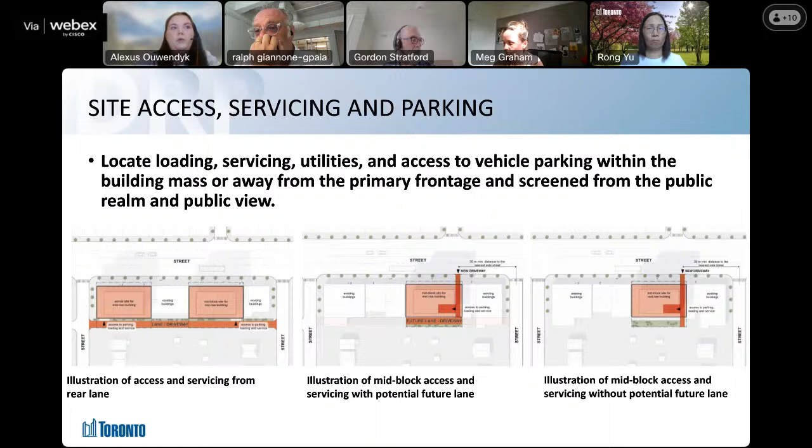So with that, I can move on to issues for design focus. Firstly, we're looking to get your thoughts on whether the key updates in the Consolidated Mid-Rise Guidelines meet the objectives of encouraging mid-rise developments that are more economical to build and more environmentally sustainable. And lastly, do you have any suggestions on loading, servicing, and parking for small-scale mid-rise buildings?

Thank you for listening to our presentation, and I will turn it back over to Gord.

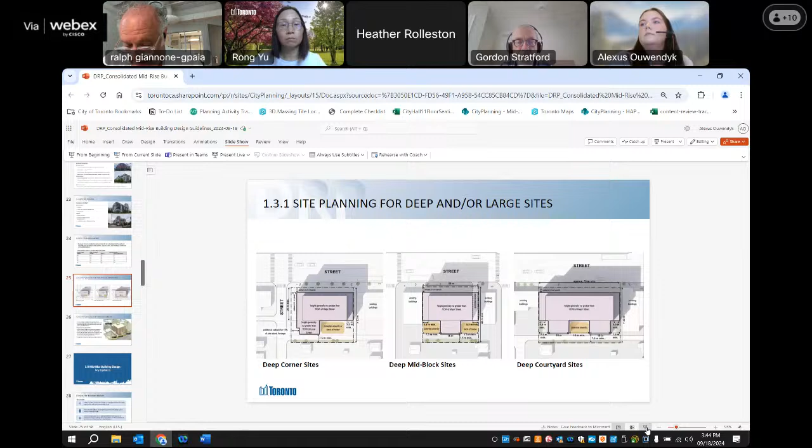Ralph: Couple of questions. One on diagram 131, the site planning for deep and large sites — doesn't really matter the specific page — on corner lots, you have graphically shown on this drawing a tighter setback on the street, and then on the side street, a larger setback. Yeah, on the left-hand side. I'm just wondering why the larger setback on the smaller street, given that there's still transition between the step back and the neighborhood at the bottom of the page.

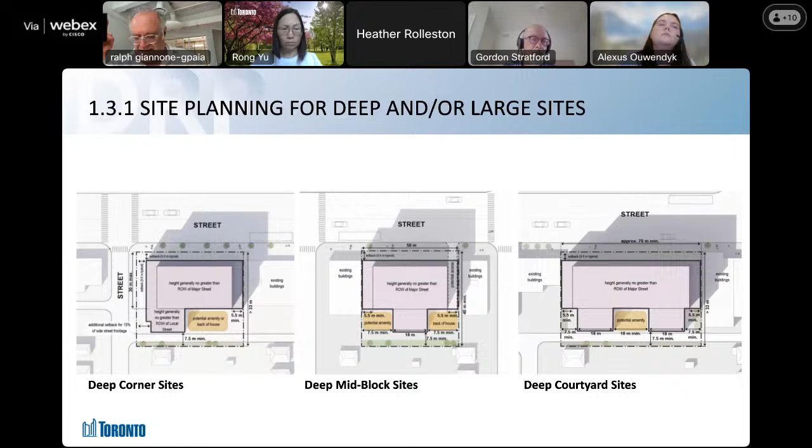That's one question. The second question has to do with — I'm kind of really confused about 323, step street proportion and pedestrian perception step back. If you can go to that one, 323. Just going to ask all three questions quickly. There, like, a 6 meter front setback, 7.2, 9 meter step backs are enormous. And I'm just wondering if there's any consideration for the typical double loaded building depth that's cut off in this diagram, and why you need such large step backs when the rights of way are so much larger. It's kind of a question — I just don't understand the logic of this.

And then the last question had to do with parks.

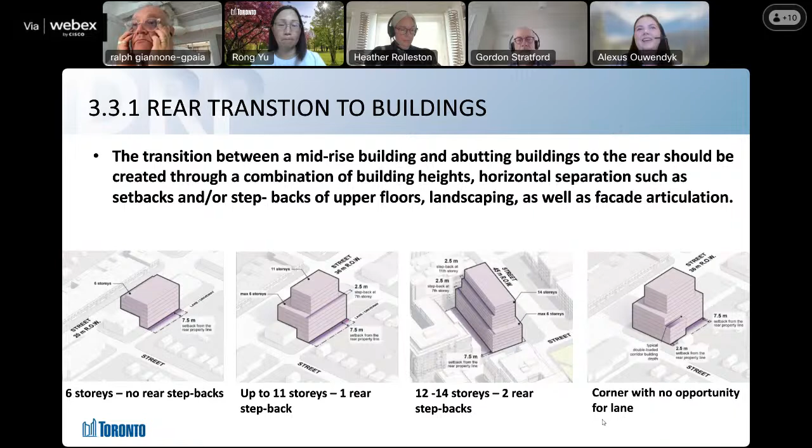And then I'll move to ask Alexus to answer the third one. Thanks, Rong. So regarding your question about rear transition to parks, this is actually something we've discussed quite a bit through our internal workshops. I think everyone's well aware that Parks is looking for a minimum 5 meters for maintenance, but we are really trying to set an urban design standard - we don't really want it to be driven by Parks maintenance requirements.

So when we were thinking of the rationale for why we want to have 6 meters from the park, it's to really treat it as if we would treat a street frontage. We want to have enhanced public realm along the park just as much as we do along the street. So that's where our rationale for the 6 meter setback came from.

Okay, I gotcha. Okay. So Ralph, has that answered your question? Yeah, and I understand this is still ongoing, these diagrams, so I appreciate that. Yeah, this is great, the sheer amount of information and the depth of study that's taken place here.

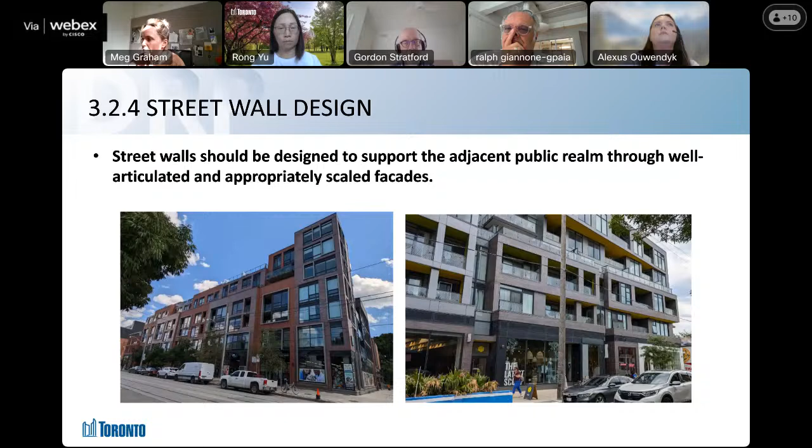How is the building height affected if the lot depth varies with the right of way? Like if there's a 20 meter right of way with a lot depth of 34 meters, is the maximum height 6 stories, or can it be more based on the intent of the massing diagram? I think the intent of the massing diagram shows if you're doing this 1-to-1 ratio, that's the 6th story. Then on the 20 meter right of way—sorry, did I understand it? You're talking about the lot depth. Is it prescriptive basically?

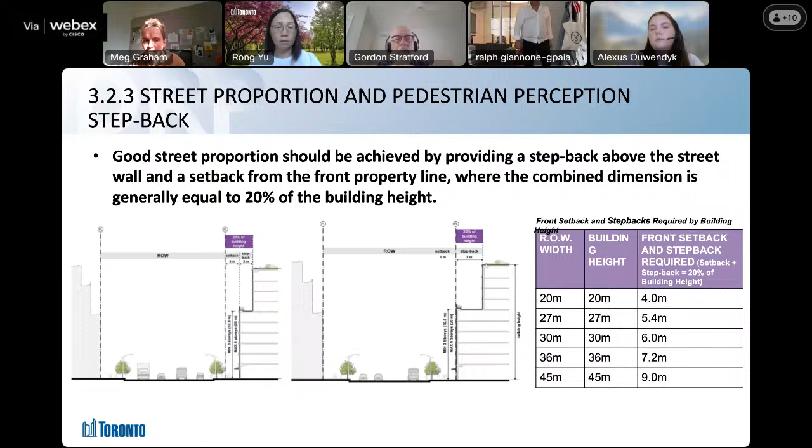As we mentioned at the beginning of the building height section, there's also large and deep lots, and if you meet other policy and guidelines mentioned... Okay, thank you, Ron.

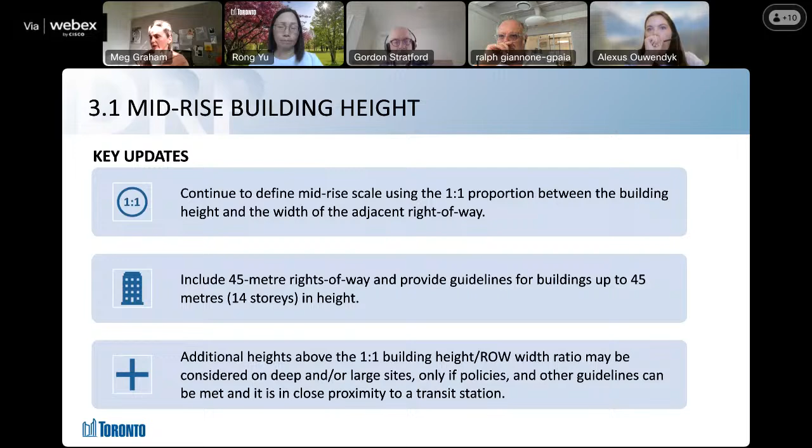One other question, page 46, or slide 46. Do you mind just including the heading of the slide? I think our numbers might be slightly different. 3.3.3. Thank you so much.

Why the additional step back at the 11th and 12th story? As we start to increase the building height, proportionally it's needed to get that additional step back, to create more separation distance between the buildings, and that provides a better transition.

I think that's... okay, it's complicated. It makes it more complicated, just as an FYI, but I'll talk about that in the comments. Thank you, that's it for me.

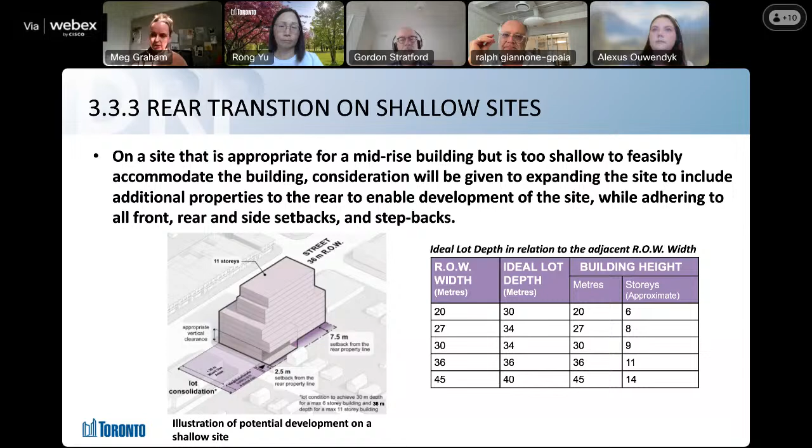Okay, then we'll move on to Olivia, and then Eladia. Hopefully this is a quick one.

You mentioned that there's now a maximum 40% glazing for residential floors. Is there any change to glazing requirements for the ground level? Or is that still at 60% minimum—is that correct?

Alexus? Sure, yeah, I think this is something we're still working on refining. We want to make sure we're including findings from the city's embodied carbon study, which do indicate that 50% is a better ratio there. So in this current draft we had 60%, but that's something we're looking at considering, and we welcome your input on as well.

Thank you. Okay, all right, and last but not least, Eladia.

Hi, I just wonder if you could repeat what you said. I don't know, I just didn't absorb it. I had the same question as Ralph regarding connectivity to parks, on 3.3.2.

Yep, no problem. Just let me pull this slide back up.

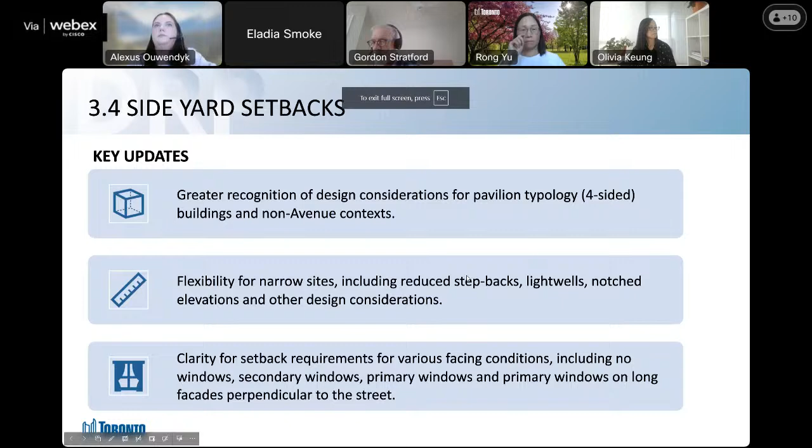So the approach to rear transition to parks considers two different conditions. The first is if there's rear access occurring along the edge of the park. In that condition, we'd look for a 10-meter setback from the property line to the building face, with 7.5 meters for access and 2.5 meters for a landscaped buffer. In the second condition, where there's no rear access and the building fronts onto the park, that setback would be 6 meters instead, treating it as a boulevard the same way we'd treat it along a street.

Does that answer your question? Yeah, and so the diagrams aren't fully accurate—the line appears to be the far side of a sidewalk there.

So in these two diagrams we'd show the condition where there's rear access, whether a driveway or a lane. We're still refining a lot of the visuals for the consolidation of the guidelines, so we just have an image at this time illustrating the condition where there's an active frontage on the park. As you can see in this example, on King Street West, there would be residential units at grade, and the setback would be 6 meters to include a pedestrian clearway as well as landscaping.

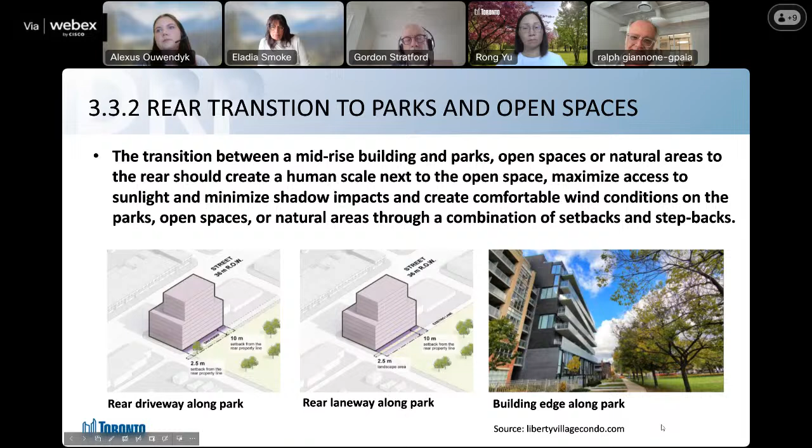It just seems like a lot to ask of a building to create a 6 meter setback and a walkway that may not be contiguous. Maybe we can take that into the comments that you make. How's that sound?